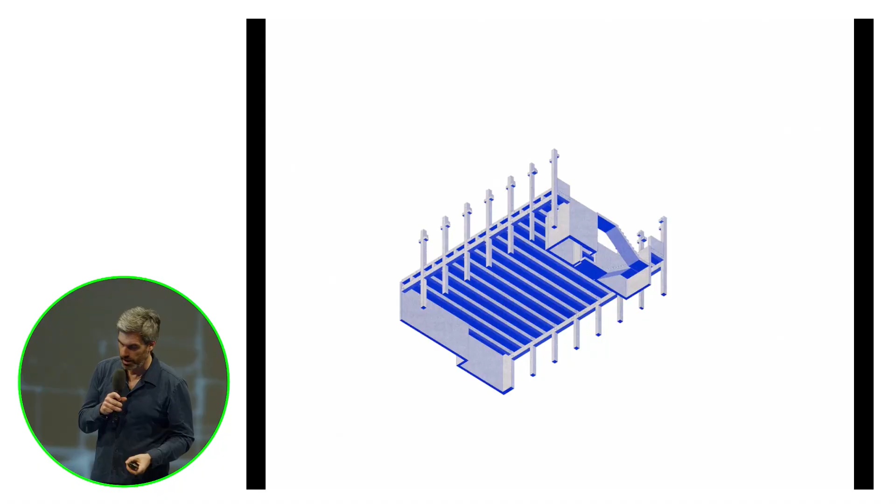The one is, how do you build very cheaply? That's one thing that people would potentially connect to the idea of prefabrication. The other thing is, though, how do you create the biggest possible variety of different ways of living?

Because normally you think of prefabrication as standardization and therefore a uniform plan that is being repeated, optimized, and repeated. That's the history of it. So how could we escape from that?

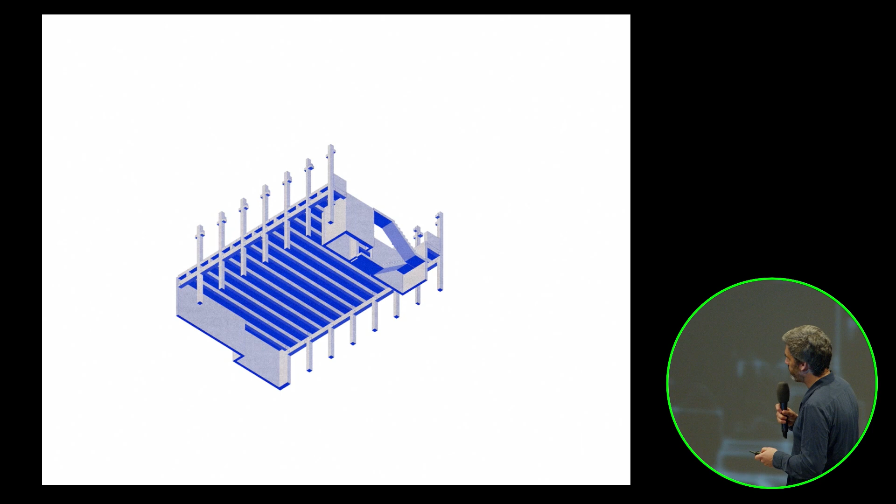I think the answer for us was actually finding a building system that's been around for decades, one for industrial construction, which you can see right here. And as it explodes, these are actually the parts of it.

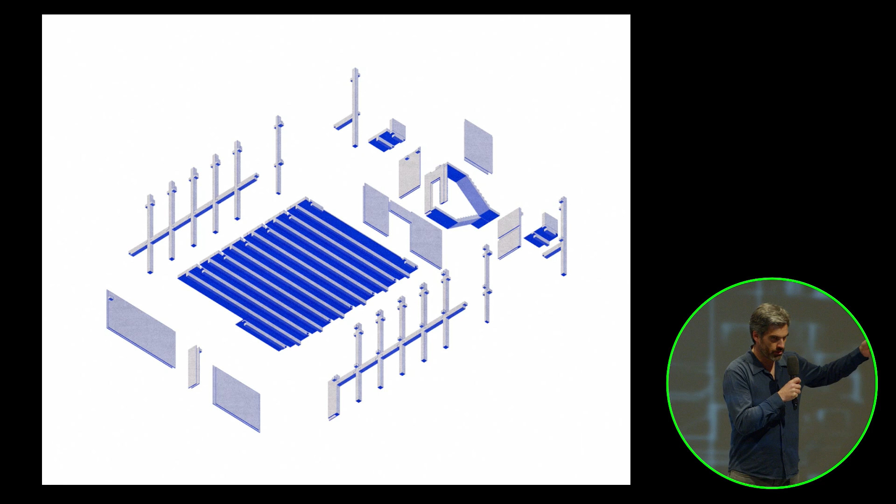The interesting part about it is that actually the structure is all on the outside, and it spans through the whole depth of the building. So on the inside, you can do whatever you want. I'll address it a little further.

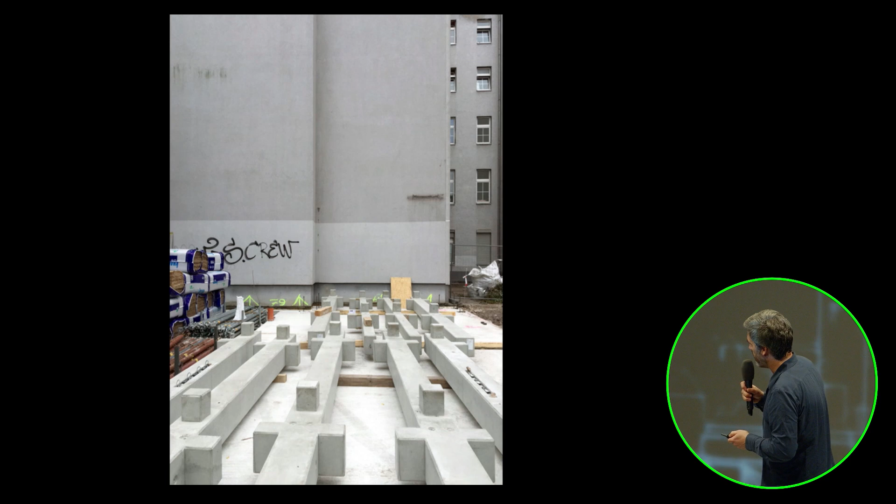So that's the model of the structure, actually. And that is a model of the pieces of one floor. You can get a sense these are prefabricated concrete pieces, as they first were delivered on site.

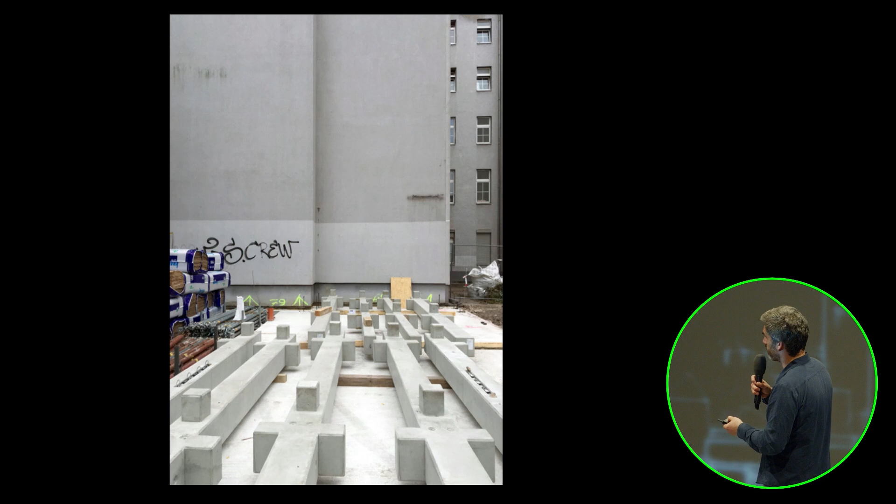So we have an inner city site, closing a block situation in Berlin. You can see these pieces, and those pieces are usually used to build industrial sites or logistics stations. Actually, the recent construction of the Tesla factory outside Berlin used the same pieces, same company.

I mean, not architects, but construction company. We wish. So now you get a sense, it's very simple. It's columns, beams, and the so-called TT ceilings.

Now I need a new button here. Yeah, this one. So they have these downstands, and they allow the structure to actually span very economically over a long distance of like 12, 13, or whatever meters.

But you can also see it's pretty rough. It's very basic. It's not architectural concrete, but it's engineering kind of grade concrete. And that's how you see how actually these pieces are made.

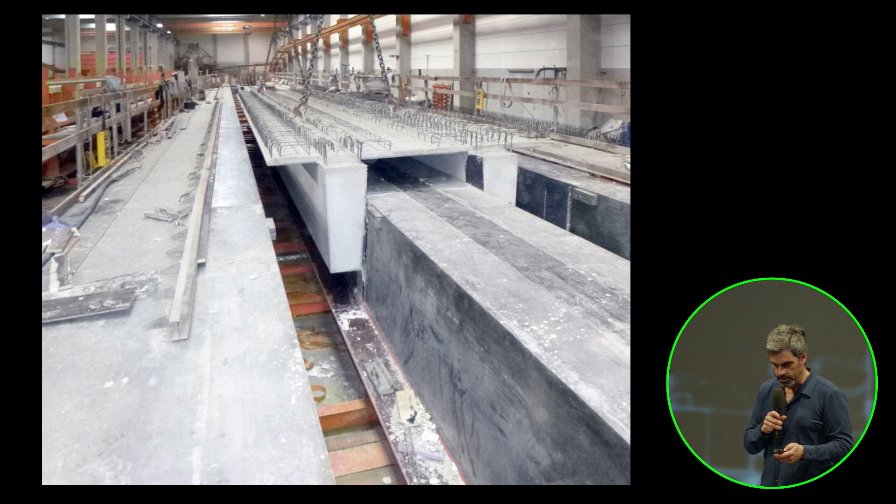Many of these factories have been around in East German history, outside Berlin, and they've been building for decades. During socialist times, prefabricated housing, and then they were respec'd and kind of did industrial work.

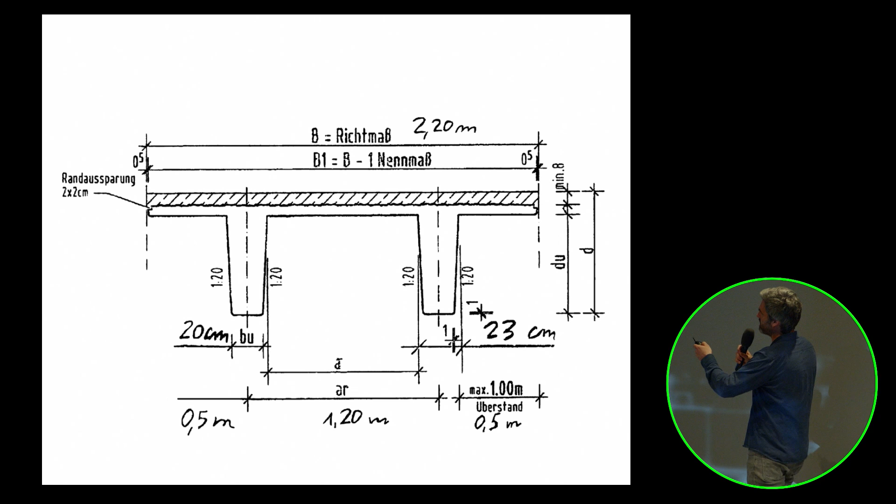So that's the key part, the so-called TT ceiling. It spans through the whole depth of the building. And actually, on every floor, we could then do completely different plans.

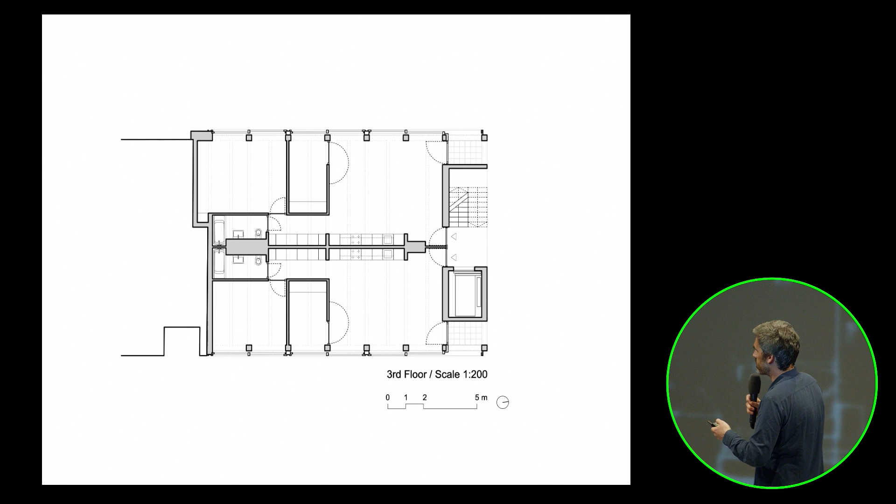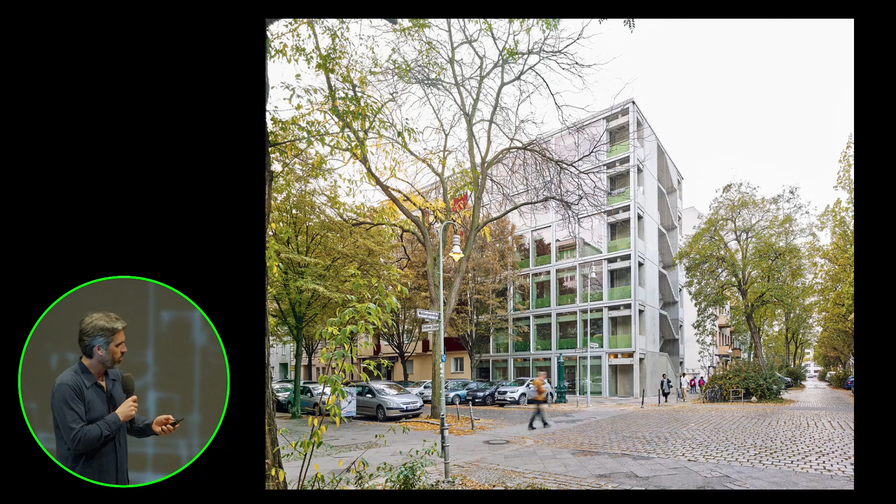The Wohnregal means there's a big shelf, which is the precast concrete construction, and within that shelf you put in what you want as a drywall construction.

You get a sense here as it sits in the city, and next to the precast concrete construction there's this facade of large-scale sliding doors and windows. During the summer months, which are hopefully starting soon, you can completely open the flat, so it's basically almost living in a large loggia on the back side. The north-facing facade is the cold part of the building, exposed to the weather, with the staircase and elevator, and each unit has a little loggia sticking to it.

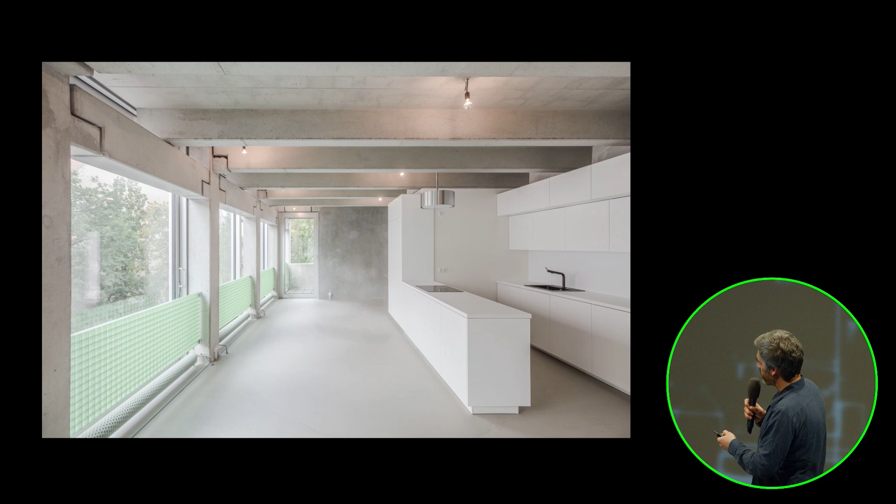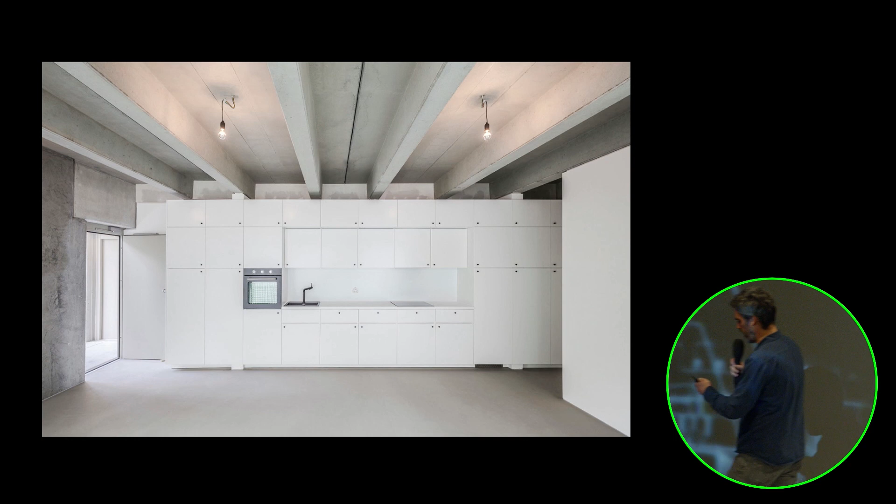So I'll go briefly through a couple of interior shots, and you get a sense of how some of these different units look. As they were, it's a rental - these are rental units, so here's the frontal view, like in another setup. You get a sense from all these photos, because they have a strong directionality, these spaces through these beams that span all around.

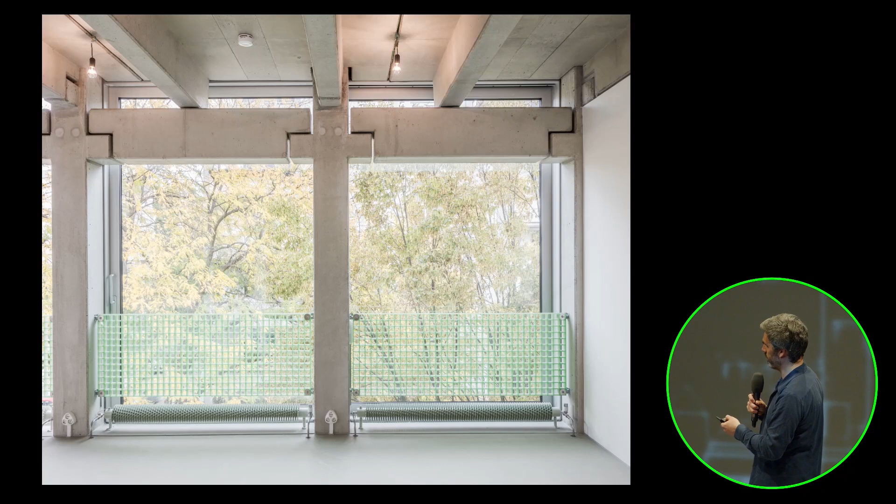Even though we're literally just moving floor to floor, they're set up and organized very differently from one another. Here you see these large sliding doors and the balustrade, and this part completely opens up, and in the summer it's quite nice - you're in the trees, you're outdoors almost.

Now, what you've seen so far are the usual architect's photos - white walls, some concrete, maybe timber on a good day. But actually, how are they actually inhabited?

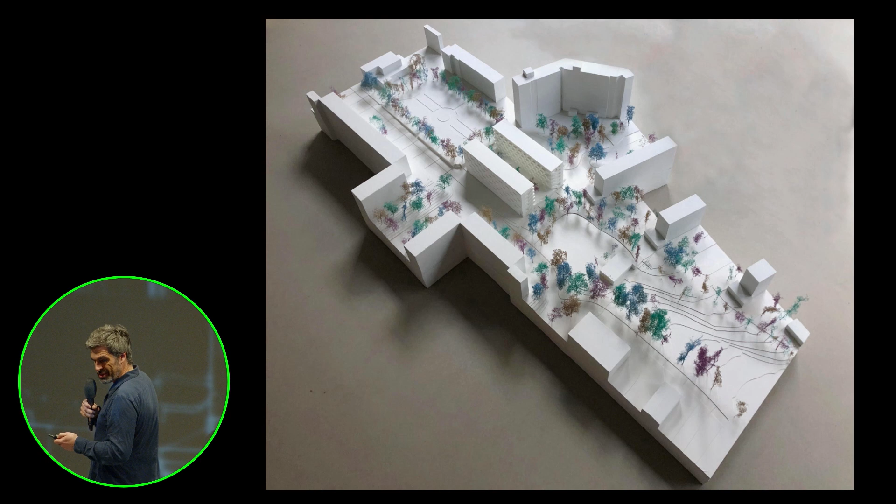So there's one other aspect - I'm confused about the time, it always stays at 19 minutes. Okay, either I'm super fast or we'll see.

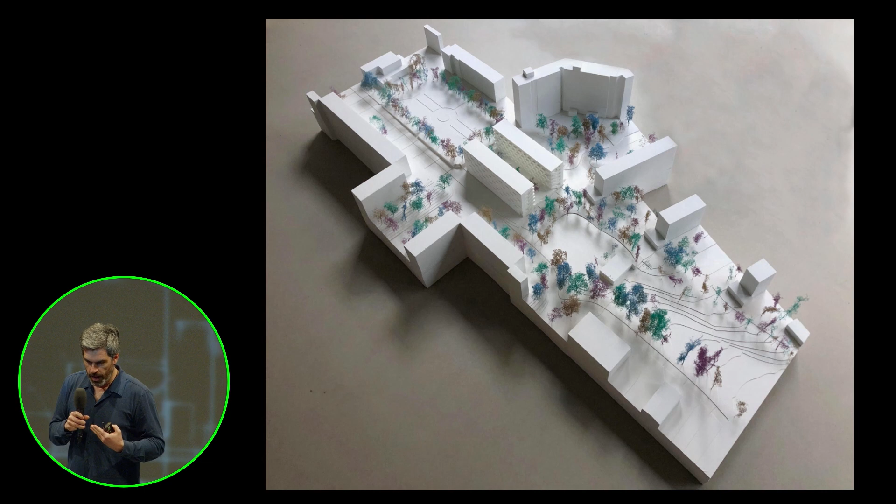There's something about the seriality that I haven't mentioned, which is obvious - you don't design a single building, but you develop a system, an idea, an approach. You invest a lot of time and knowledge that you gain, and then you hope that comes the opportunity to actually work with that system more than once, maybe repeatedly if you're really lucky, and maybe also on a different scale.

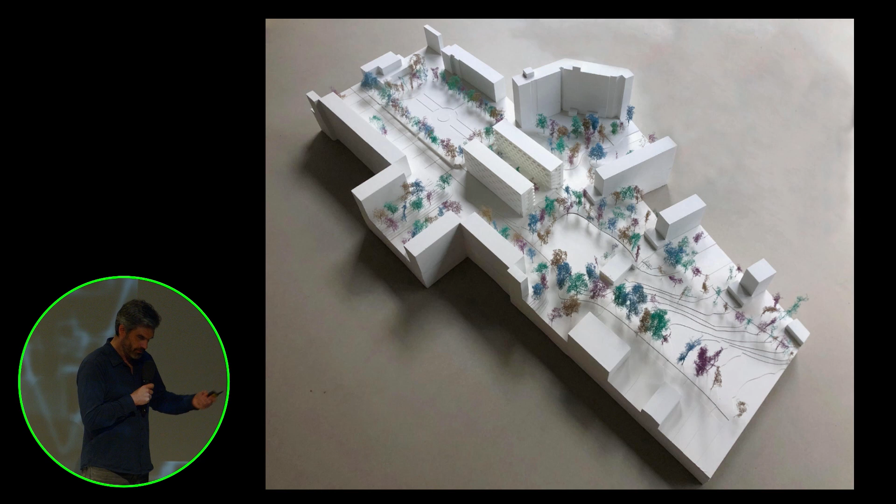In that case we were lucky, not only because someone approached us to take on that system and build with it again on a larger scale, but there was something particularly interesting: the Wohnregal actually developed an offspring that was bigger, but also set in a very interesting setting - one of these early 80s East Berlin housing estates. It basically is prefab construction of a different era.

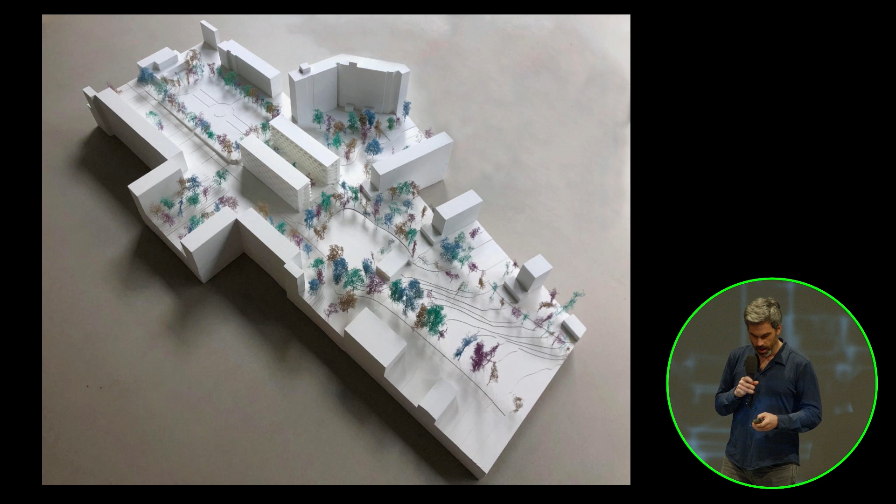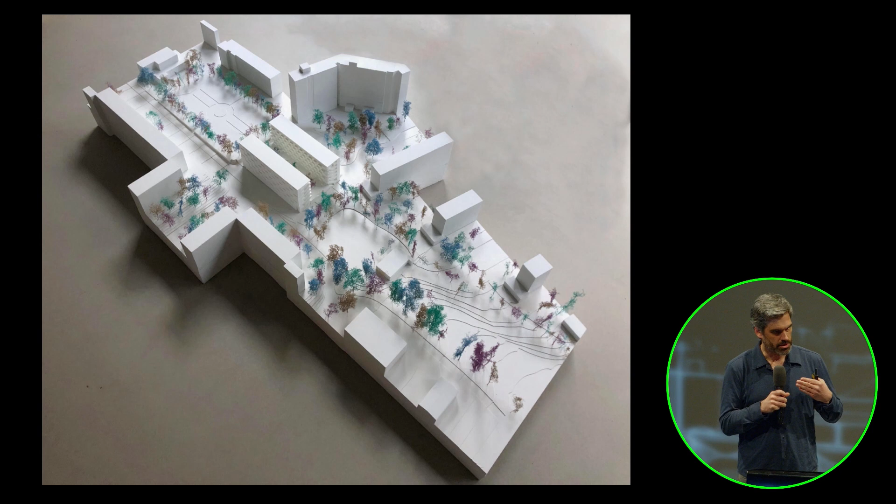It's like meeting your architectural grandparents. You're confronted with something, and if you know the surroundings of Prague we will see many of those too. It is, as I say, like meeting your architectural grandparents, but in a good family - there is some resemblance, but there's also some way you differ. If there's nothing you differ in, then there's an issue - you should move away. So it became clear to us to also point out where do we go along.

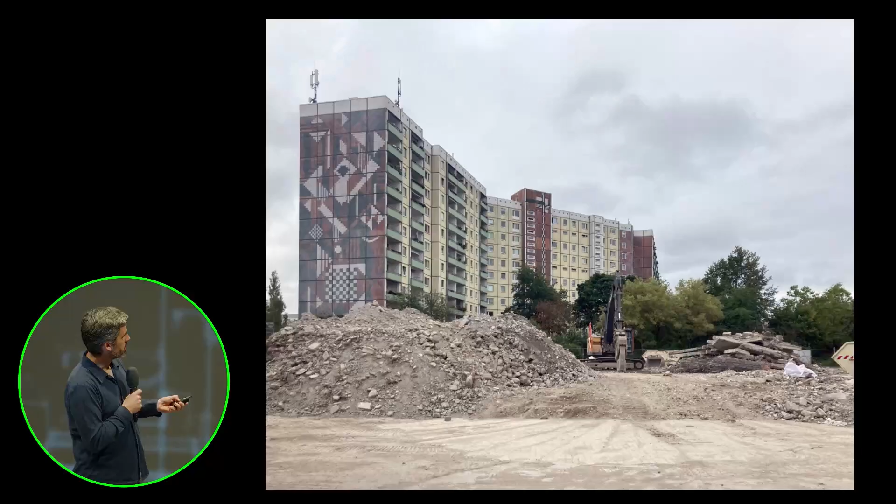Where do we have a lineage that we continue, and where do we actually set ourselves apart? This is the surrounding of ours, and it's all prefab. These are precast pieces - in German, you call it Plattenbau, and Platte basically means a plate. The name gives it away because you can see the grid.

Basically, prefabrication also means you prefabricate the space making - you prefabricate walls, and by assembling them you always get the same plans. The idea was to optimize a plan and repeat it to the nth degree, to total architectural death ultimately. We have a skeleton structure, and you systematize, but the space making actually happens on a different level, not through the prefabrication.

It's interesting because it's under construction right now, so you can see these two worlds and these two ideas of prefabrication next to one another. I assume there's something similar here, but in Germany there's a prejudice towards prefabrication, through a kind of historical setting.

You see again the pieces, and in this case we have a base piece with parking and mobility, and on top of that, as you move up, there are two rows of housing. While the first building, the Wohnregal I showed you, has one frontal circulation, here you have a gallery circulation with private balconies facing one another, and the units are all poked through with daylight from both ends.

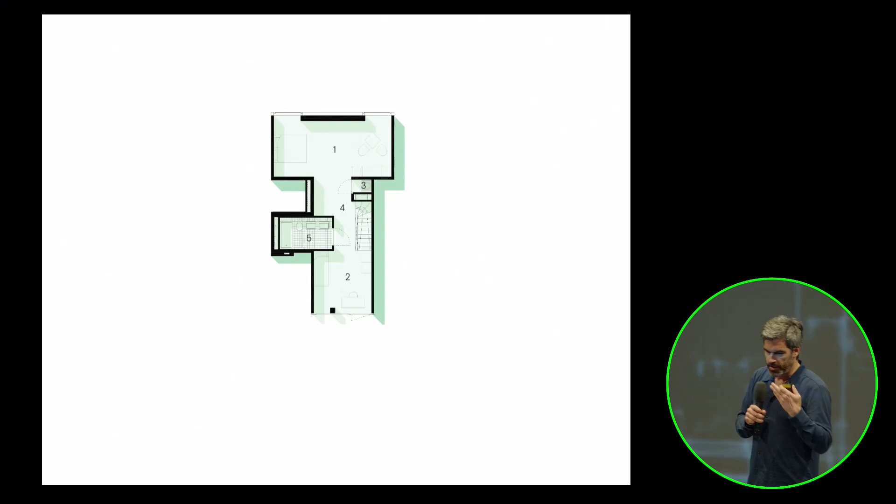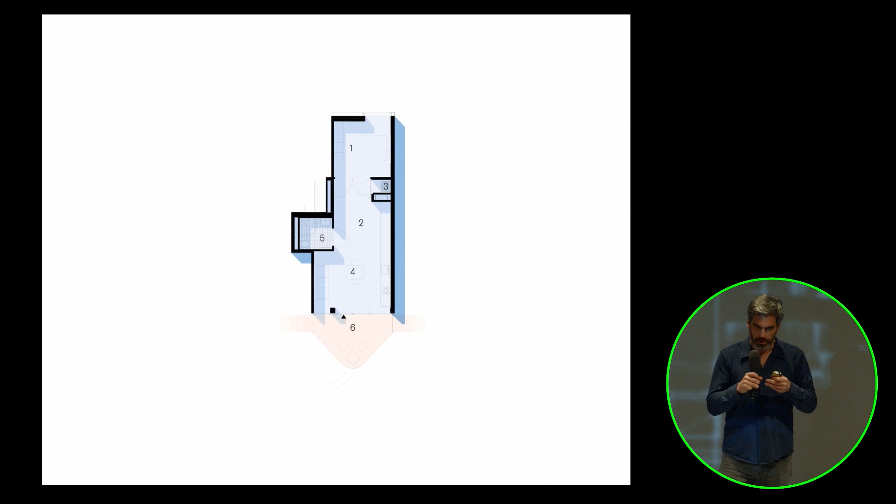Now to counter the previous idea, something set in many mindsets - that prefabrication means one fits all kind of unit - the idea here is to maximize variation. You have a very repetitive structure of over 1,000 pieces of concrete, but ultimately more than 50 different types of units. There's a large degree of variation with a very simple set - these are the cores, this is the main structure - and within it, maximum variation. That was the premise we set for ourselves.

Here you get an idea of how it was first visualized. You have these two rows, two gallery circulations, with balconies facing one another. It's a strange thing, because like these large housing estates from the early 80s with large green spaces, sometimes you lose it - you literally wonder where the urbanism is.

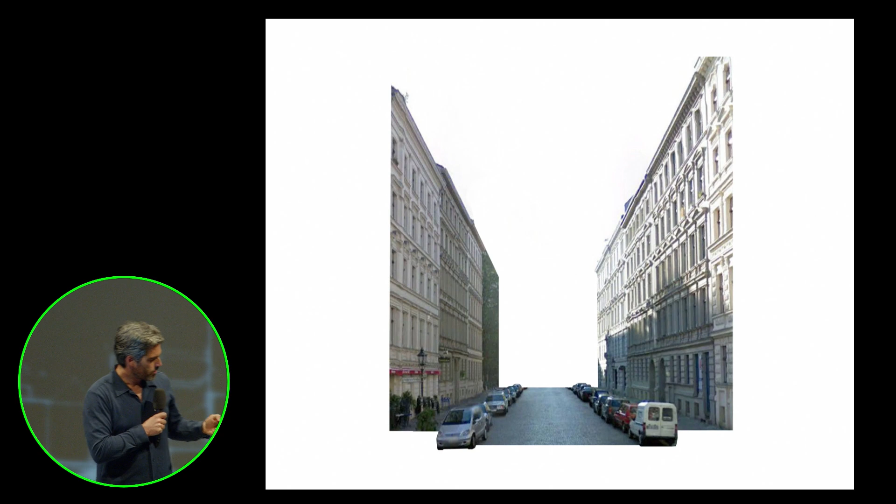This one is actually quite interesting - it has a very classical urbanism with a big green axis, and we're sitting at an interesting point within that. But as you densify these areas, where do you take your sense of how dense you can get? In this large scale, there's a certain brutality to it, and suddenly you move very close to one another.

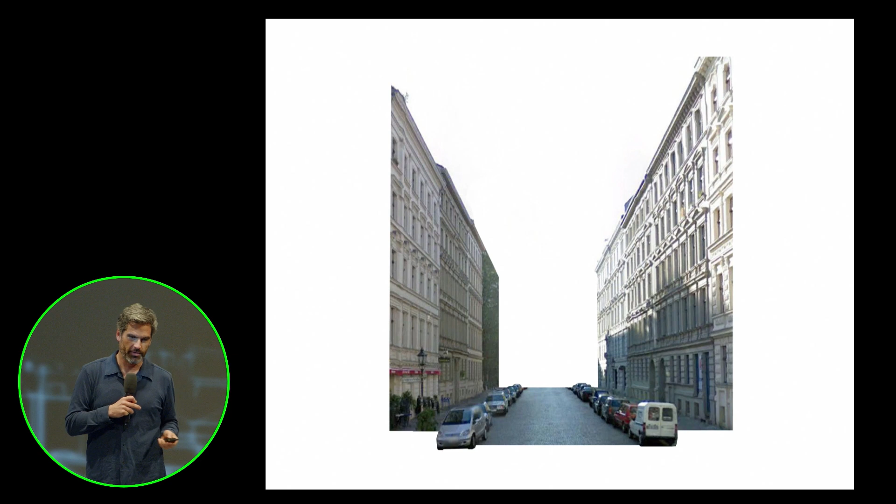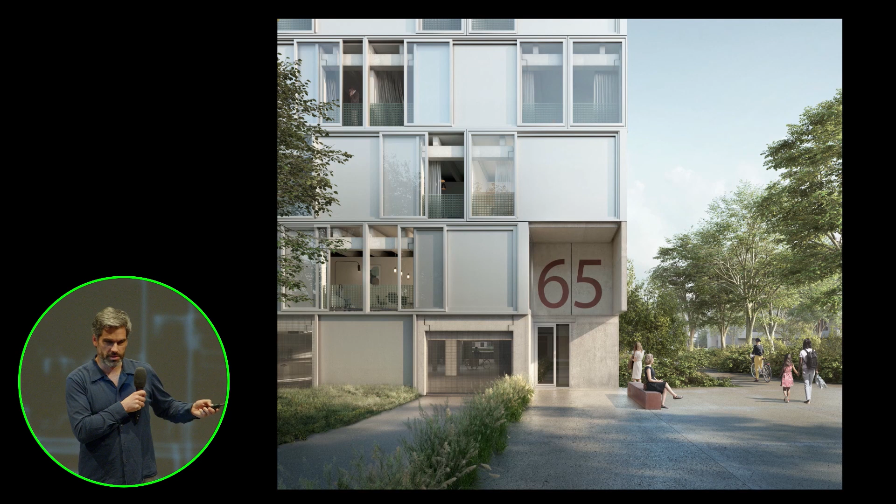It was very difficult to find the right scale in that. We approached it using the traditional Berlin end-of-19th-century housing streetscapes - we know their width, their heights, and how comfortable or uncomfortable they feel. This is literally the same proportions as we built. You see the precast elements as they poke through, insulation surrounding them, and the balcony plates on top. You have the outside facade, and you'll recognize the sliding windows, only with a slightly lesser degree of glazing.

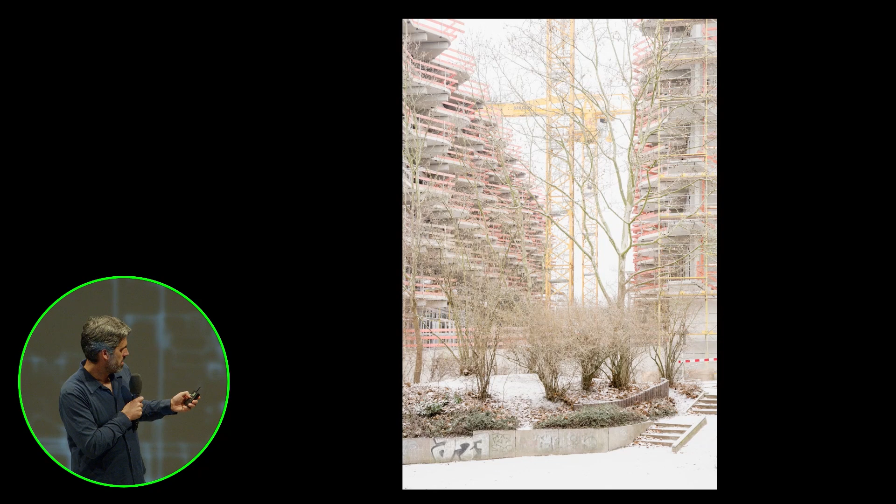I'll finish up with these two last slides, as it is under construction on a Berlin winter day. Thank you very much.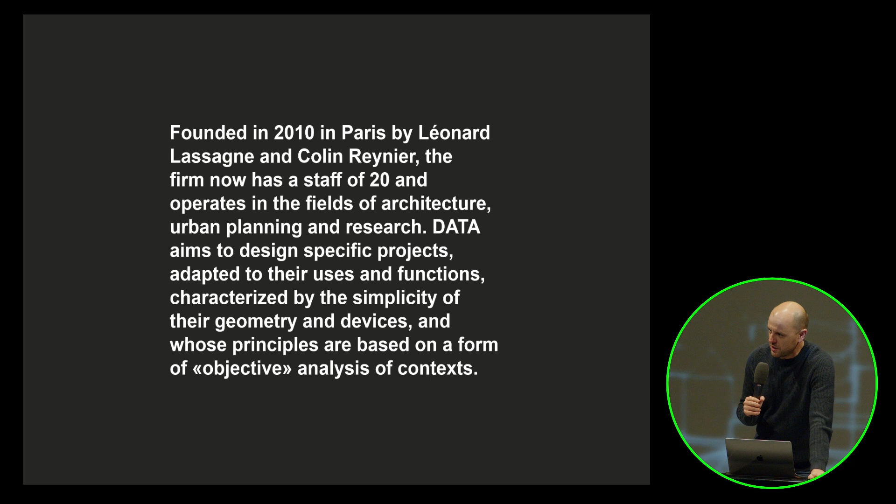Your presentation was really interesting. So I'll try to explain our work and the project of RATP housing in Paris. As you can hear, my English is not so good, I need help probably, and this is the reason Laure and Willem are here. I like it when the architect who worked on a project speaks about it themselves, it's really important to me. So we decided to talk about two main things.

I founded my agency in 2010 in Paris with Léonard Lassagne, and our agency works on many kinds of buildings. So we decided to talk about two main things: first, our practice history, who we are, where we are from, and what could summarize our work in theoretical terms.

Secondly, how we understand the question of history with the question of heritage and ways to transform existing buildings, because my agency works principally on existing buildings in France and in Paris. We can probably say we've been strongly influenced by architects and designers of the 60s and 70s, and also by the famous French architect Christian Hauvette.

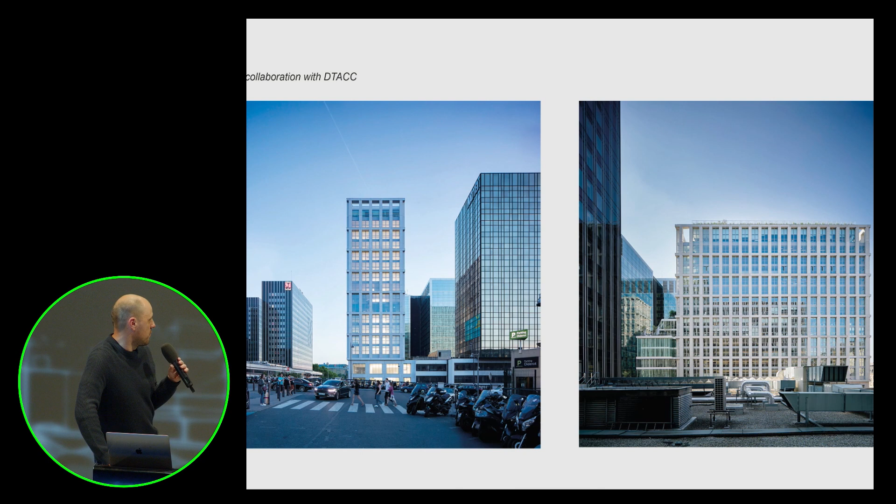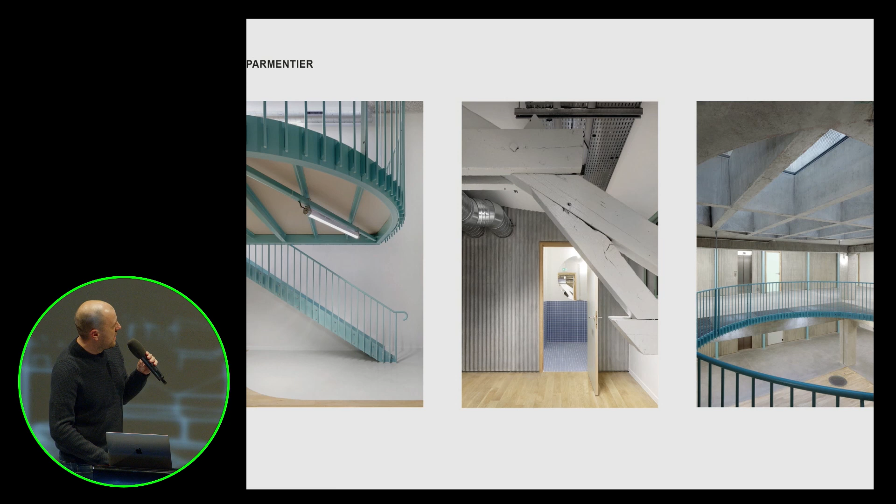Another project in Paris is the transformation of an existing building near Gare de Lyon into an office, which was a really important project in Paris. Another project, we transformed a patrimonial building in the center of Paris and created new offices, combining new architecture and new design for this project.

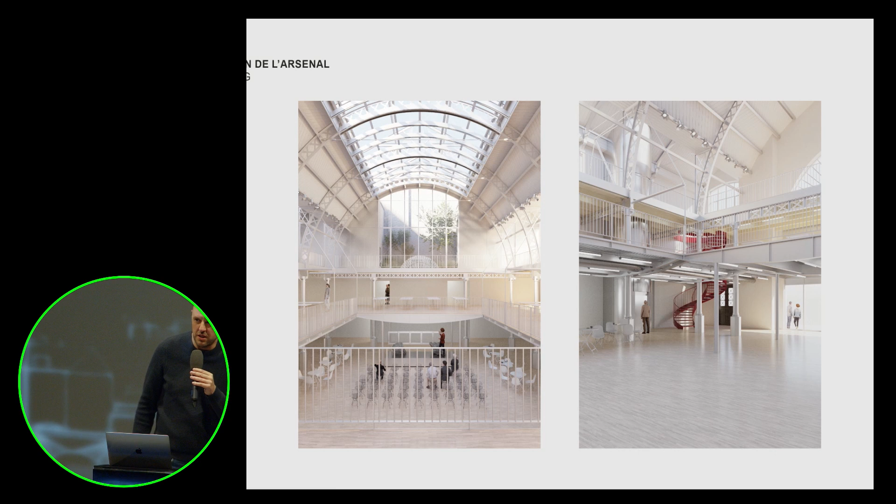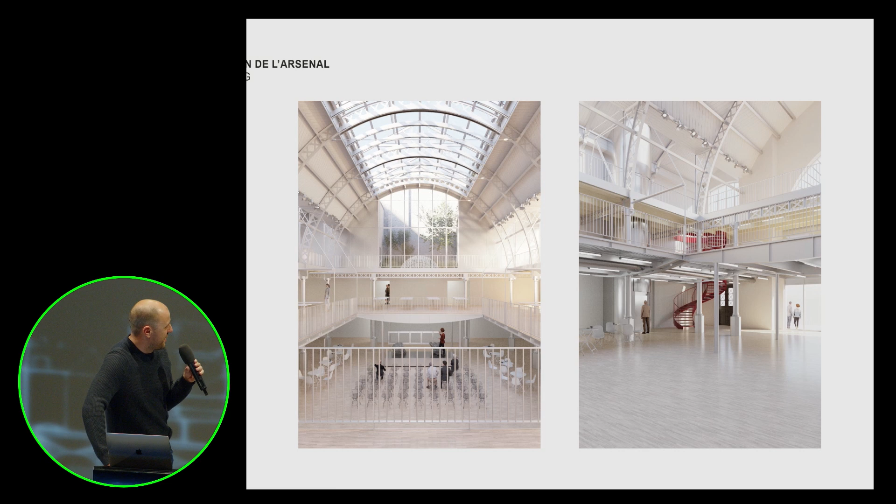This project is a new one we're developing now: a transformation of Pavillon l'Arsenal. Pavillon l'Arsenal is like this building, it's really important for French architects, each French architect critiques my work there at the end. So this is another approach.

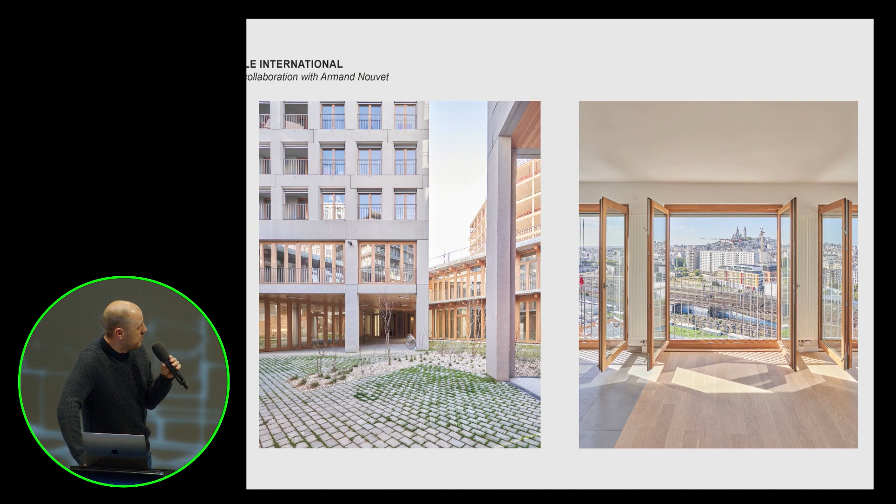Prefabricated housing at Porte de la Chapelle. We developed this project with Armand Nouvet, another French architect. It's housing too, and we have a view on Paris.

Another project inside Paris, in the protected area Le Marais, where we created a commercial area for Groupe Galeries Lafayette. This was before the crisis, because now you can't work with Galeries Lafayette, they do nothing, they're finished.

So now we'll speak about this project, RATP Housing. This project is close to Place d'Italie. You can see, just look, we worked on this building.

During the competition there were 4 teams, and we had the choice to decide to destroy or to conserve the building. We decided during the competition to conserve it. So I said to the other companies, the other architects, today I don't know if I'd choose the same thing because it was really complex, but now it's finished, so I'm happy.

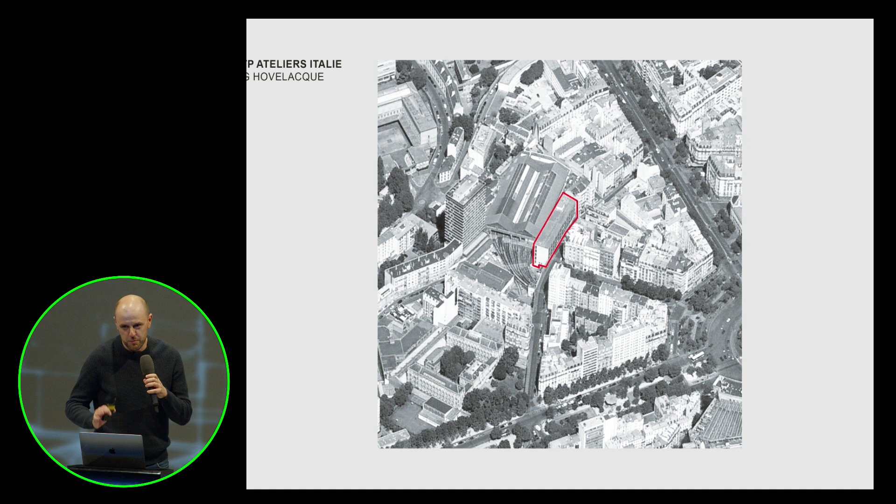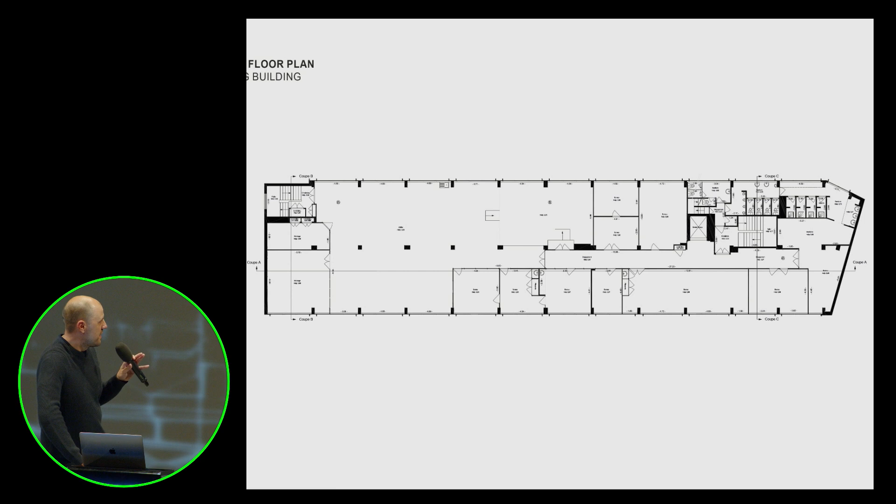This is the existing building, I think it was a good building. This is a plan, so it's really simple: you have a column, you have a facade, a really simple building with upper floors.

The other difficulty is being near an industrial context, because RATP repairs all the trains for line 6. So it was a construction with this here: you have the rail, and you need to build the building while the trains are here all the time. So it was not really simple.

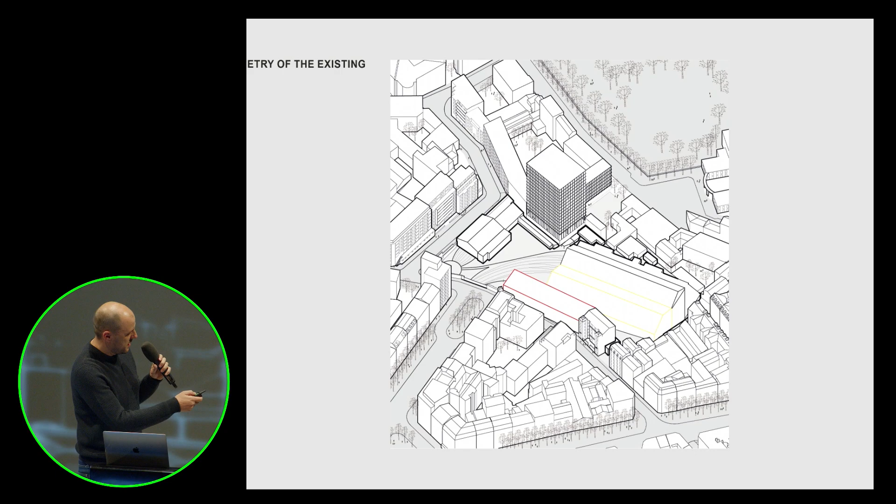So as you see, the project of RATP is to remove this part and to transform this building. They create a new hangar to repair the trains, and create 52 houses for their workers.

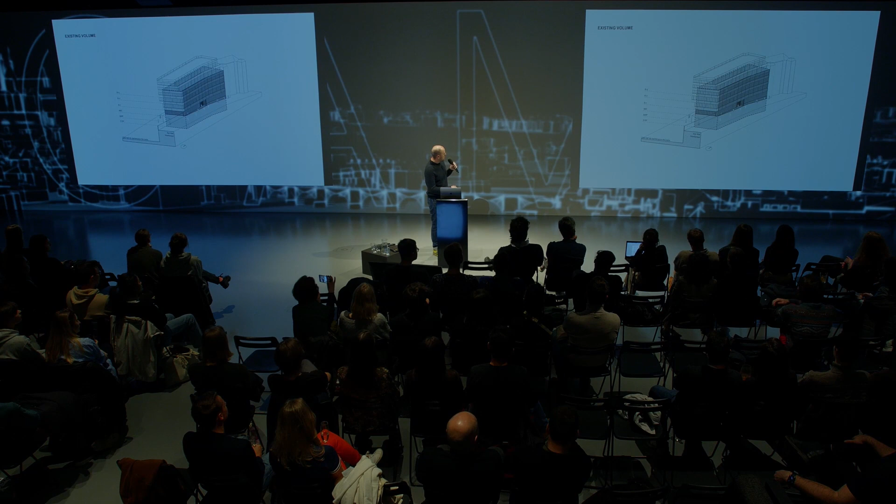And in the basement, we create a program for offices for line 6, because all the trains go inside the subway, and after they go to Paris for the station.

So this is the existing building, and here you can see the volume of the existing building and what we create. We add 2 additional levels on the existing structure. The second thing is to create a winter garden on the industrial site to protect all the houses from the problem of train noise and many things.

Another extension on this part. And this is a section. So here you have all the technical offices for line 6, and here you have all the new houses for the RATP. The problem is we have 2 clients.

It's the same group, but we have 2 clients, and they don't speak together. So here we have a limit. Every column, every pipe stops here, and we just have a negotiation to have a connection for the ground floor for the houses. So it was really complex to have one building with 2 clients with two different opinions, with two different targets.

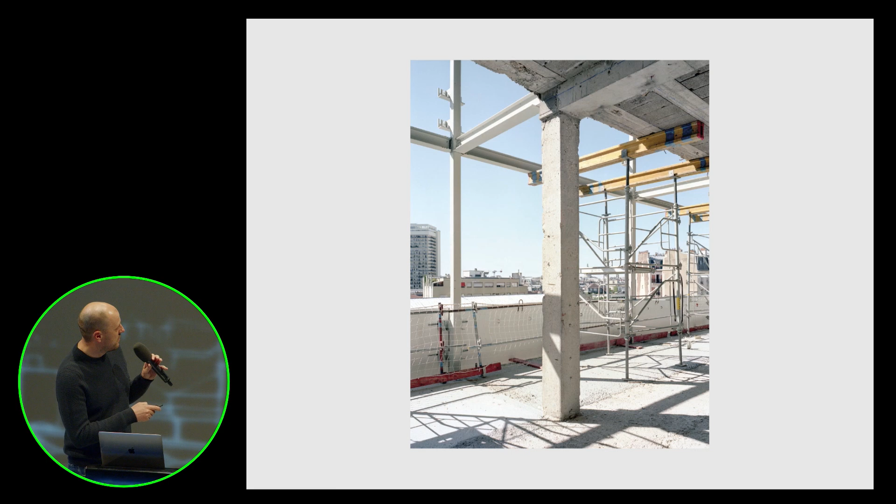A picture from Paris. A new picture near the maintenance station. So this is a question about the weight - as you can see, the columns are really, really thin. It was all the time our difficulty, because we need to have really thin elements. Columns are really thin, and the ground and floor are really thin too. Everything is in metal.

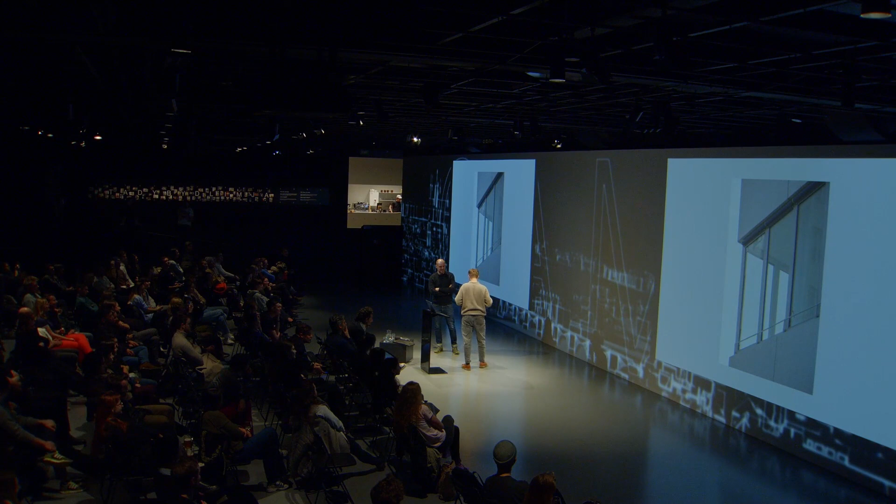So you have this photography. You have a contrast: existing building and the new building. So this is the building before, and this is the building today. I don't know if it's better, but today everybody really enjoys being here.

So Willem will speak about the facade. Merci, Colin.

The apartments in Paris are not big compared to other cities, but what makes them cool is the view. So what we wanted, because we don't have any restrictions in terms of structure - our structure is based on columns and beams - we decided to make these kind of stripes of windows, and thanks to this concrete parapet, you can even make a kitchen here, and you can enjoy the view while cleaning your dishes or cooking.

In our project, in the upper part you have housing and the control room, as Colin mentioned, and the intersection of these two programs is on the ground floor. So on the ground floor, you can see the kind of pockets which allow us to enter the apartments, and the rest of the building is offices.

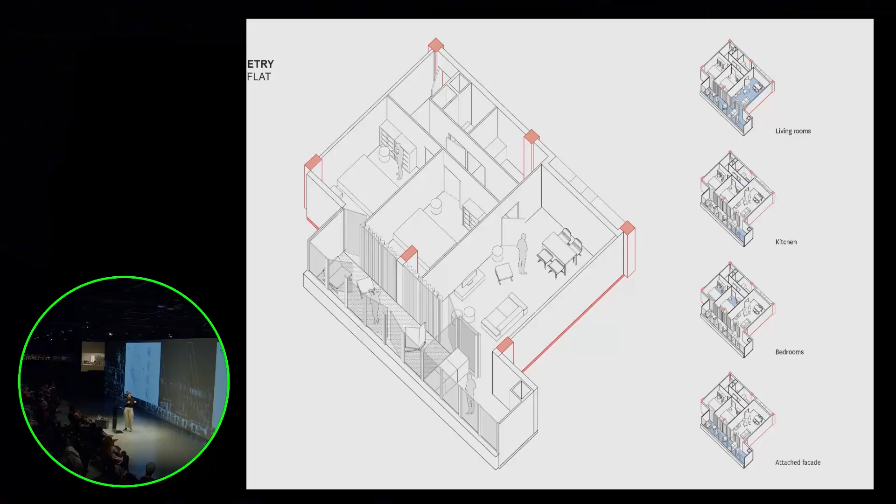So a few words on the quality of housings. As we said before, we added winter gardens and kitchens on one side of the building to protect the existing building from the industrial site. Thanks to this addition, living rooms are extended to the front, to the facade.

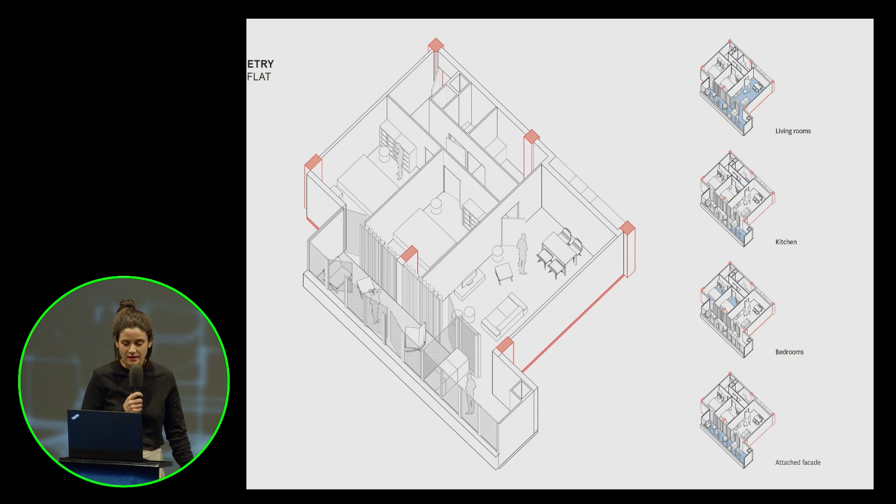So we have this feeling of a larger room. It also protects the bedrooms from the noise and from what's happening on the industrial area. This winter garden is an unheated space, but it plays the role of thermal and acoustic protection for the bedrooms and for the housings in general.

It also allows a different type of distribution through or along the facade, which we can call the French corridor. It's like some typical distribution in castles, for example in France.

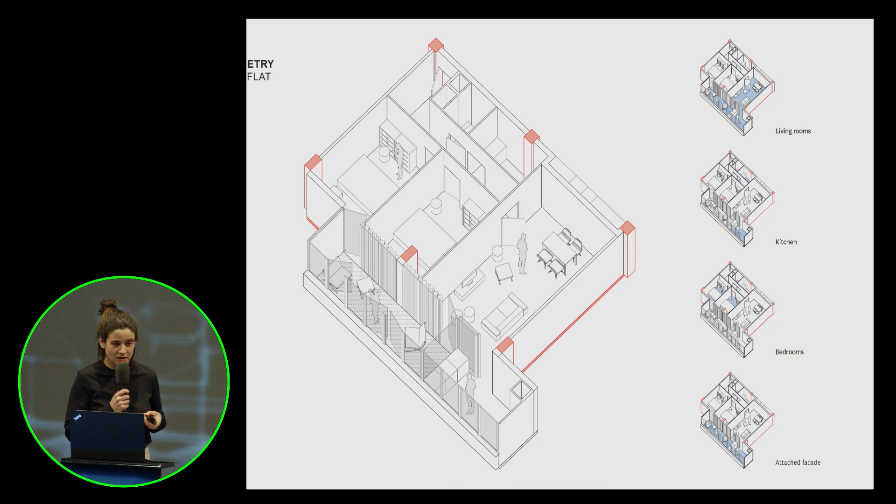Another important thing to say about the process of transformation is that in general, when you build a new building, it's more the building that is built around the program. In transformation cases, it's more the programs that will adapt to the building.

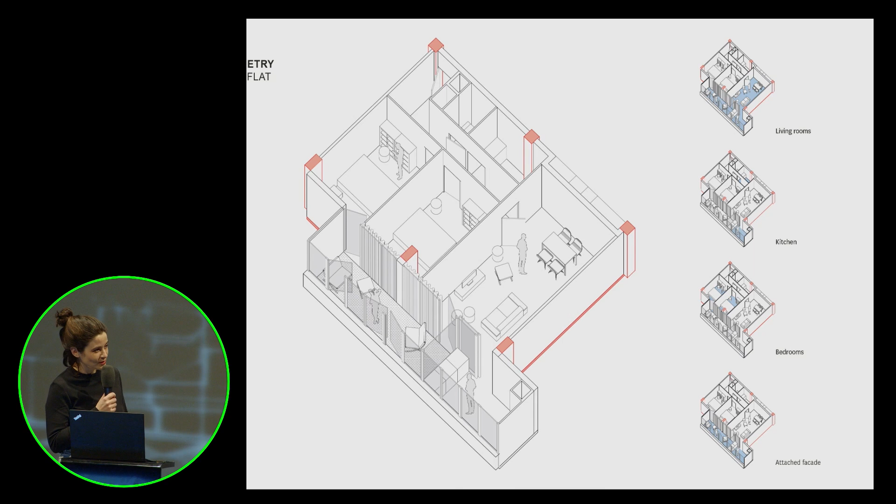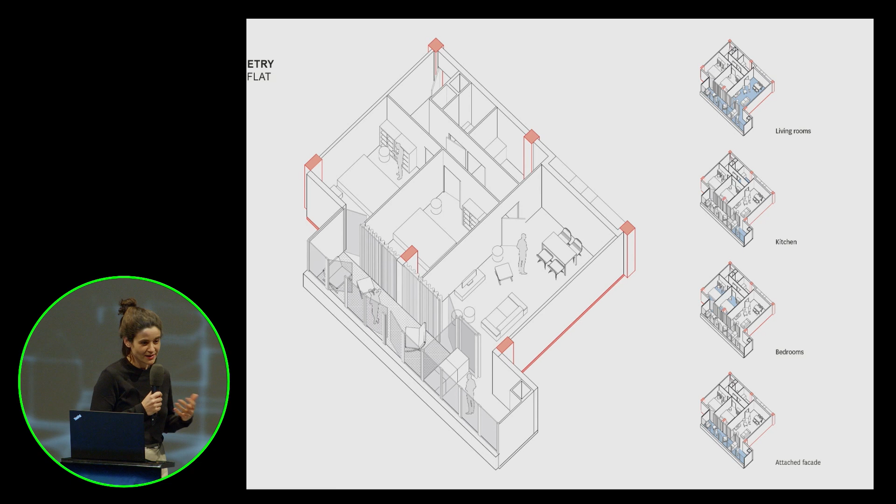So it leads to two things. First, it leads to some discussion with the client because you have to adapt. The program will adapt, and you can't really answer the program perfectly, because if someone asks for a Parisian flat, which are quite small, sometimes you have to add a few square meters to make it work inside an existing building.

Here we can see the example of what I said about the double facade, like the winter garden. The distribution in the facade leads to this external or middle external space. The rooms are protected from the industrial building on one side, and lighted on the second facade, but you still feel like you have more space. Also, as we said before, we worked on this facade, so we had a glazed band all around the building, so we can really see through Paris, which is a really particular situation.

The fact that we have to adapt the program to the building leads also to variation in a typological subject. Here we see random flats from the building. The richness of this is that you have several typologies, like cross typology in the corner or mono-oriented, but with terraces or with this winter garden.

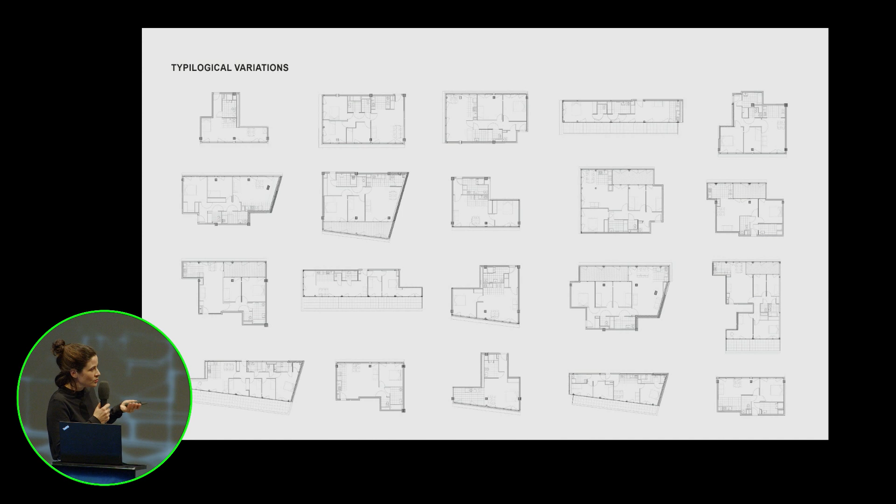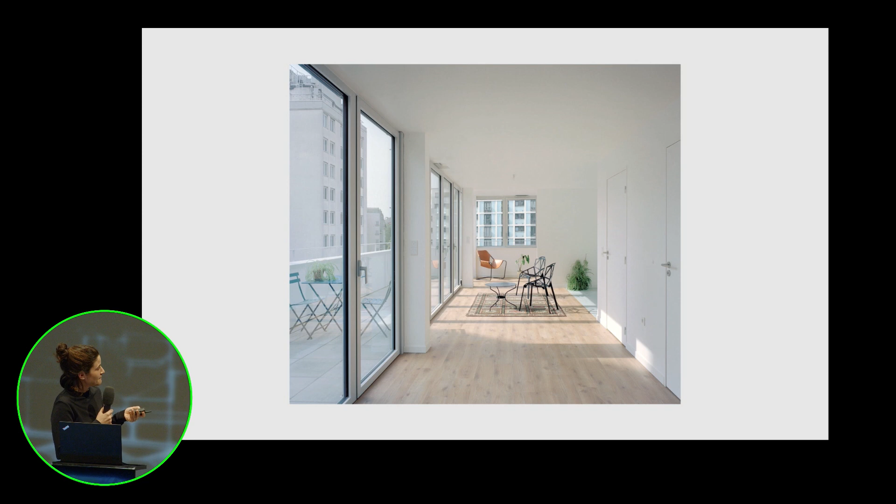We can also use the existing building to have variation of ceiling heights. In these buildings, we have less access to natural light on the lower floors, but these lower floors are much higher, which in a way leads to better housing. On the two added floors, you have a low ceiling, but large access to light, and terraces, because the added floors are detached from the front facade.

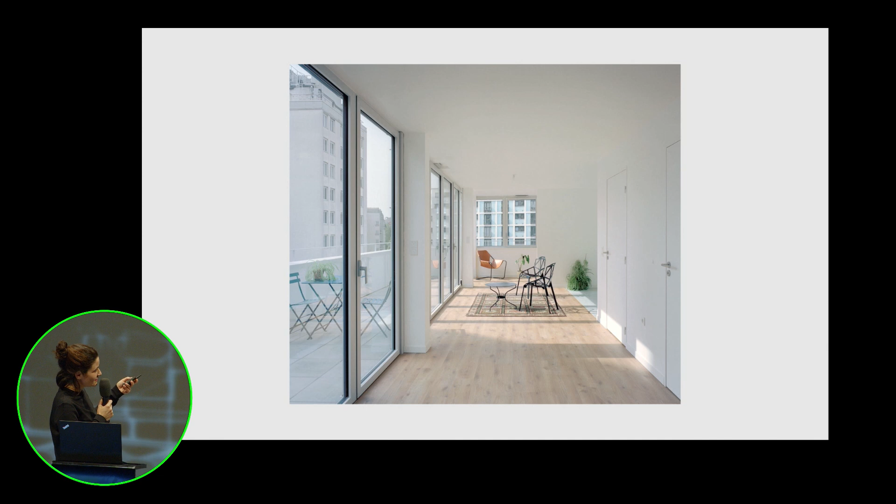This is a view of the upper floor, the added floors on top. There was quite a discussion about these housings because they're only two rooms, and they're super open to the terrace.

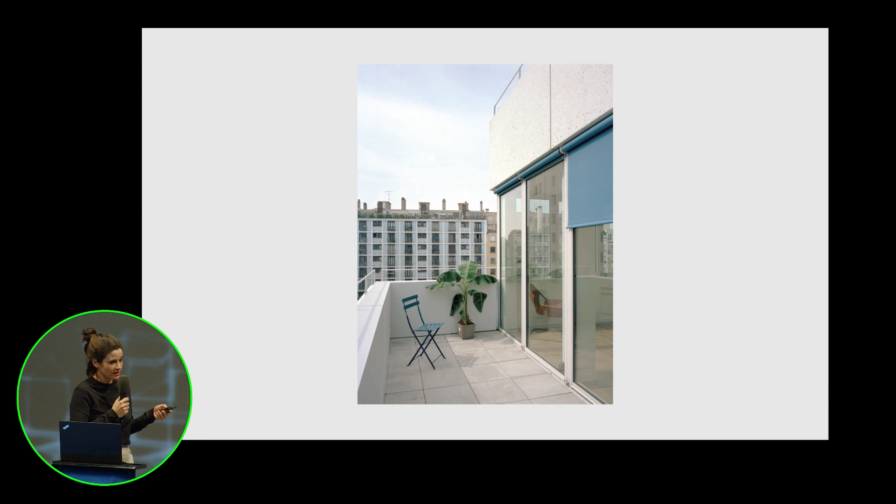This is a picture of this. Mainly on one side we have winter gardens, and on the other side we have these large terraces. So each facade has one specific purpose and answers to the surrounding. This is a view of the building from the surrounding.

I don't know if you want to add something, but I think we've said everything.

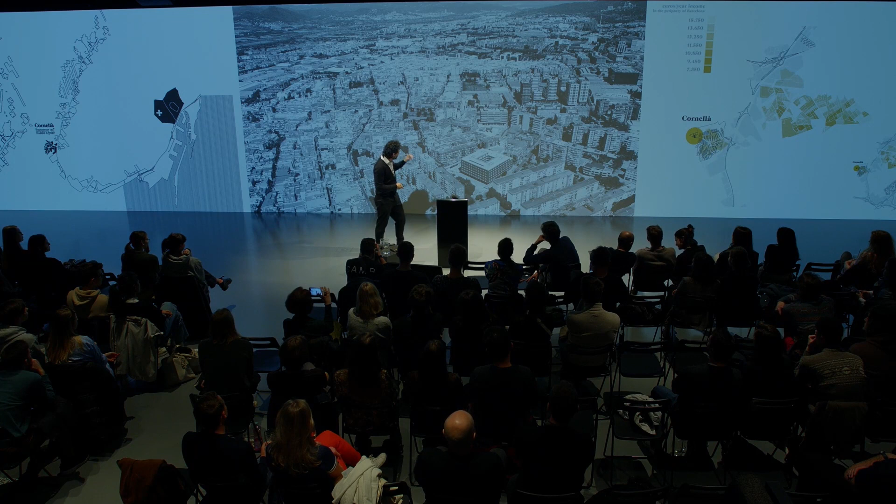Cornellà is a town, but actually belongs to the metropolitan area of Barcelona. It's in this neighborhood that in the 60s was moving, they moved people there, and it's a very low income area, full of these buildings, and it occupies a plot where there used to be a cinema. Before the competition, the people were saying, 'Pisa sí, pisos no.' It was saying this because the cinema was called Pisa, and they wanted to still have the cinema, and they didn't want to have the dwellings. But I think now they allow us to be there.

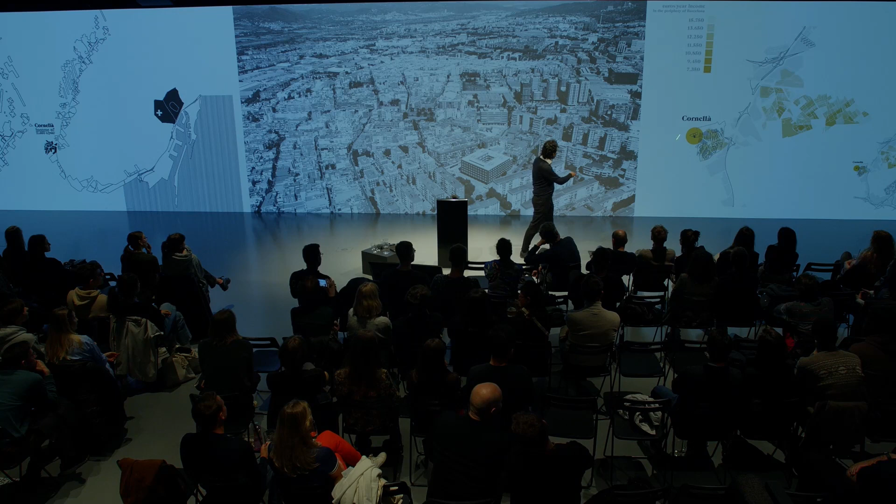But the important thing is the income area. This is the same city map of the metropolitan area of Barcelona, just showing the low income per habitat in the city, and these are the poorest areas in the city. This is one of them. They are around here, less than 10,000 per year.

Okay, we did the competition, and we had the plot. The plot was this thing that we couldn't change the planning regulations, so we had to fit our building in this 50 by 40 plot, and it was compulsory to have this patio of 15 by 25. We nearly didn't do the competition because we thought there was no interest. But then we thought, well, what happened if we, instead of beginning from the city...

What happens if we begin from the interior and try to do a building with all equal rooms. Making all equal rooms changes a lot of the rules of a house, because when things are equal, they are easily changeable. And where things are equal, there is no hierarchy. You don't have a room for the parents and a room for the kids, they're all measured the same. We thought it could be a way to answer the new ways of living that we have after COVID.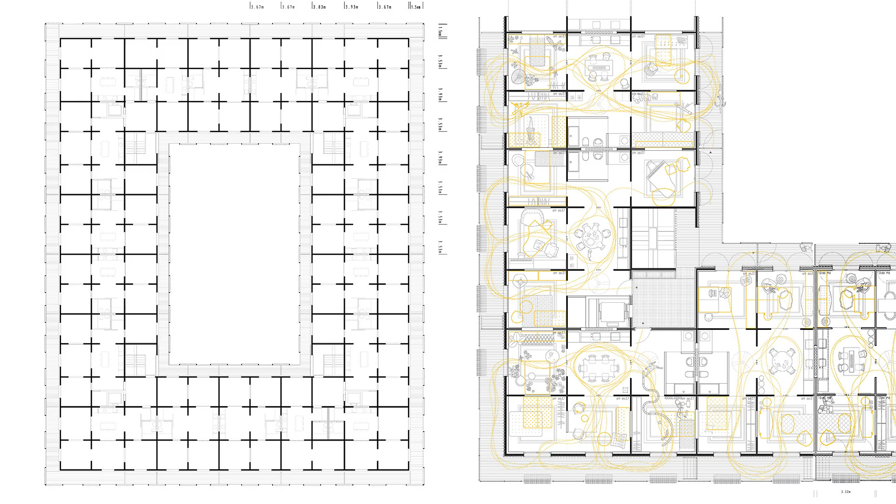Then we have this idea of the plan. The important thing of the plan is this idea of indeterminacy. For us, it's good news that when somebody sees the plan for the first time, it's very difficult to understand which are the limits between the different units, and even the limits between the public space and the common areas. Okay, here we can see it more.

So we have 4 cores, each one in one corner. Here, with 2 kinds of units. One, this aggregation, you enter to 4 dwellings per plan, and in this aggregation, you enter to 5 of them. So you have 5 and 5, 4 and 4.

So you get, in this common room, another room of 360 by 360 where the lift leads you. The stair also fits in the same matrix, okay? And this is the only corridor that we have.

So the important thing is that from here, you enter into a private terrace. Normally the houses have 2 terraces, the one of the entrance and the one of the outside.

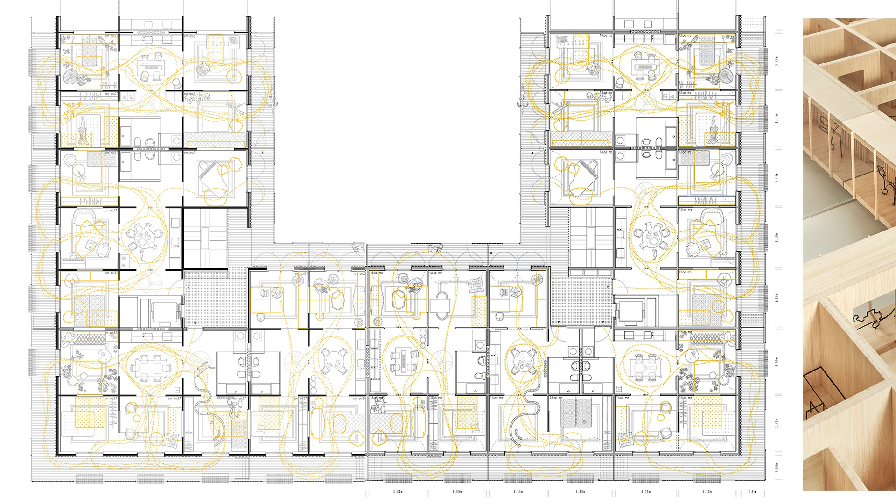Here the same situation, and in the corners there's this situation, the 4 modules and a half, and 4 modules and a half, 2 rooms, 2 bedrooms. Another situation was 6 modules and a half because you have the lift, and here you have another 4, 5, 6 and a half, and another. This is another corner with 6 modules.

This is all the corridor. This is the common area. And here, you see, this is the entrance of a house. So you are entering through the exterior space.

This is a kind of a collage, a way to change the scale for us. It's important, people are entering through the porch and going to the lifts. But then for us, it's important these sequences of spaces, the porosity of the plan, ending to the room, to the corners, the importance for us of building the corners in order to help people to lay their furniture.

And when you enter the house, you have this porosity. This is a bedroom, but you can lift your eyes and see the exterior through the private spaces. And it's important not to see the end, not being able to see all the dwelling in one point of view, to have some things out of the plane.

Okay, so the kitchen, the importance of the kitchen in the center of the house. That's what helps us do a house without a corridor. Placing the kitchen there visibilizes the domestic work, so it helps us work against the role of gender, but also helps us do all the circulations through the dining room, and the kitchen becomes again the center of the house.

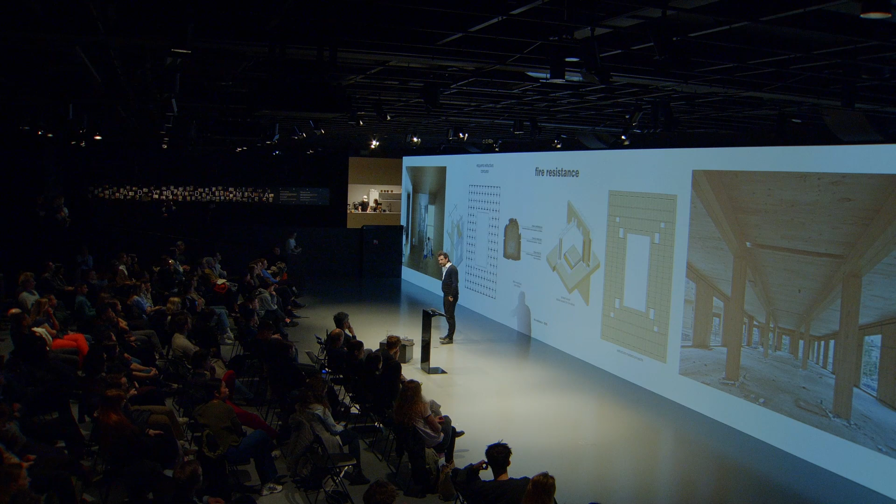When we did the competition, we were thinking of this ideal structure, making all the crosses with timber in order to generate this image. We were even thinking of leaving all the structure exposed. But when we began to understand how to build with wood...

The fire resistance was one of the main issues. There are two strategies for fire resistance. In this building we need 90 minutes of fire resistance, meaning we have to keep the building standing for 90 minutes. One strategy is to allow some part of the wood to be burned: each extra centimeter we add gains us 30 minutes. So for the slabs we left exposed, we added 3 extra centimeters to get 90 minutes.

The other possibility is to put plaster boards; each plaster board covers around 30 minutes. So in this case we used 2 plaster boards plus 1 extra centimeter in the CLT of the facade. We were able to do this for the slabs and facades, but for the middle crosses it was very difficult, since it meant adding 3 extra centimeters on each side, which was too expensive. So we decided to change the strategy to beams and pillars of glulam in the middle of the plan, because they can achieve fire resistance without extra material.

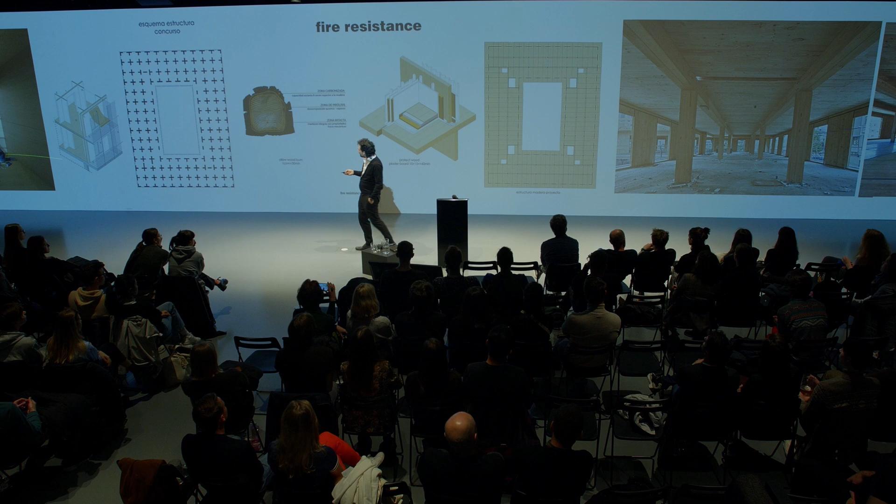It's social housing, and we had a very low budget to do it. So one of the things was to work a lot on the optimization of the structure.

From the beginning of the competition, we took a span of 360, and we thought about the deformation of a board with 2 supports, which was around 6 millimeters. But if we made it continuous with 4 supports, we compensate moments. This was a very boring lecture we had in university, but it was useful in this case.

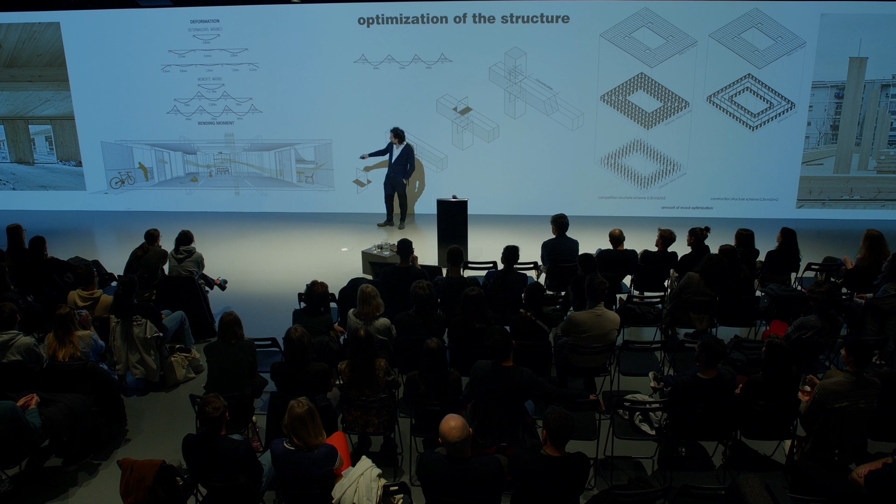The deformation can go to half. And if we add the cantilevers, the deformation gets even lower, around 1 millimeter in the interior part. That's how, at the beginning, we needed more than 15 centimeters.

We were able to use only 12 centimeters with the optimization of the compensation of the bending moments. Then we built with 15 centimeters in order to have the 3 extra centimeters we needed for fire resistance.

For the pillars and beams, we had to do the same, but we cannot have continuous beams along the whole length of the building, so we had to make joints. Making joints with wood is very complicated—they use dowels, and it's very difficult to have a hyperstatic system. So making the joint at the support would have meant not compensating the moments.

So the decision was to make the joints where the moment is zero, at 1/5 of the distance between supports. That's why we designed this piece—the clue of the building. This metal piece allows continuity of the pillar, while the beam can pass through on one of the sides. It's 40 by 36, so it's 2 beams of 20 by 36—20 being the standard width of a glue-laminated beam—to make this joint.

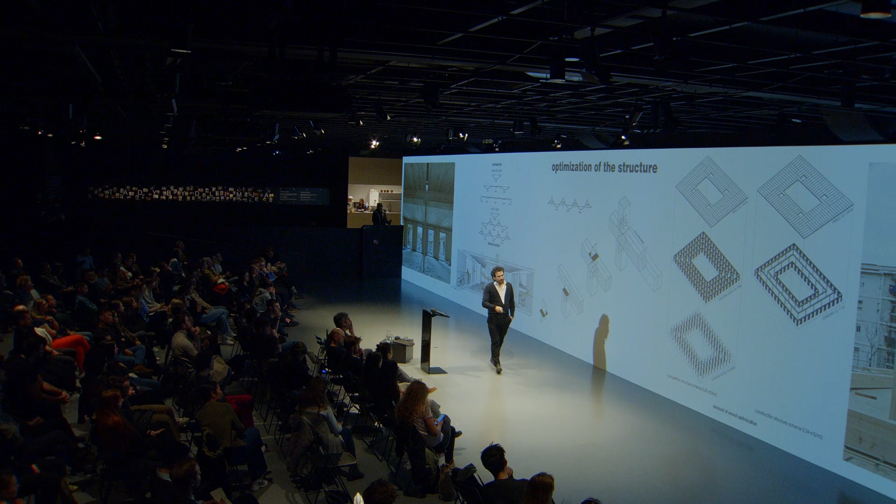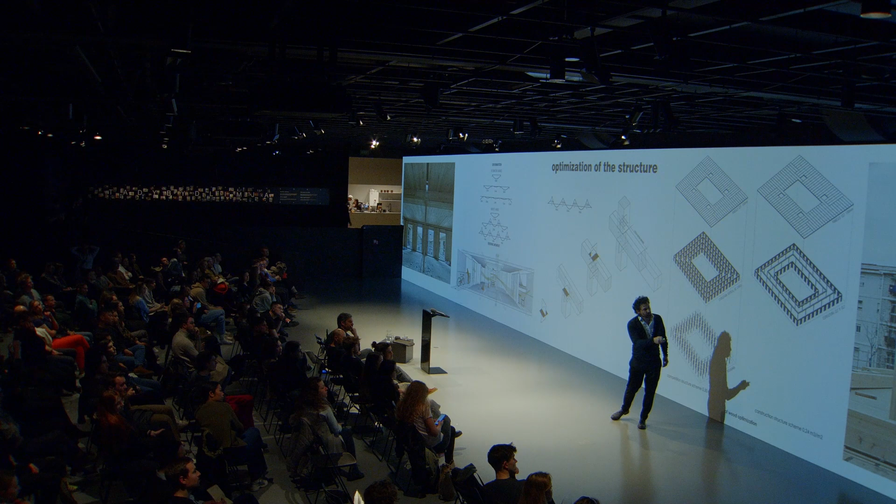Here you see the piece, this is the element. For us this element is very important, and this is the detail—you see how the beam passes through, and the pillar goes through the same space where all the conduits run through the building.

So the final thing is that in the competition, we needed 0.5 cubic meters per square meter. But in the one we built, keeping the same boards and facade, only changing the interior structure, we have 0.24 cubic meters per square meter—less than half. So I always say that even though building with wood is sustainable, building with half the wood is more sustainable.

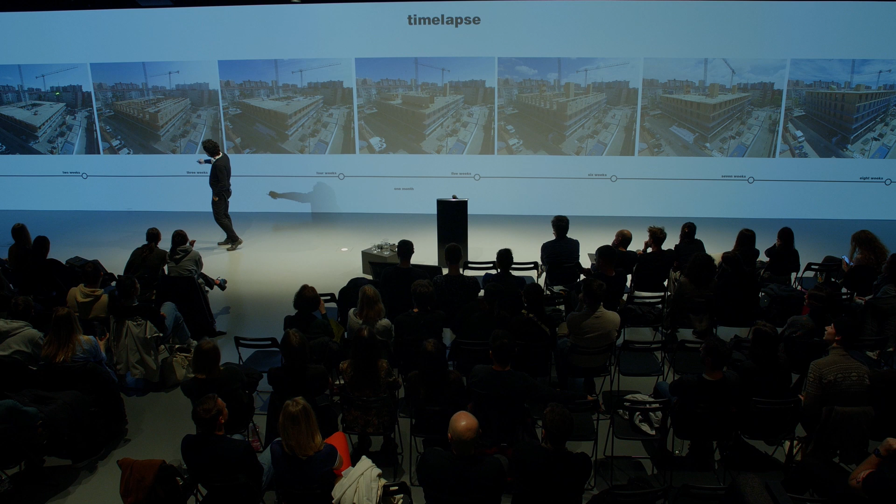To finish, this is a time-lapse video—each photo represents one week. This is the first week. They begin slowly because the difference in levels between concrete and wood is around 5 centimeters from one corner to the other.

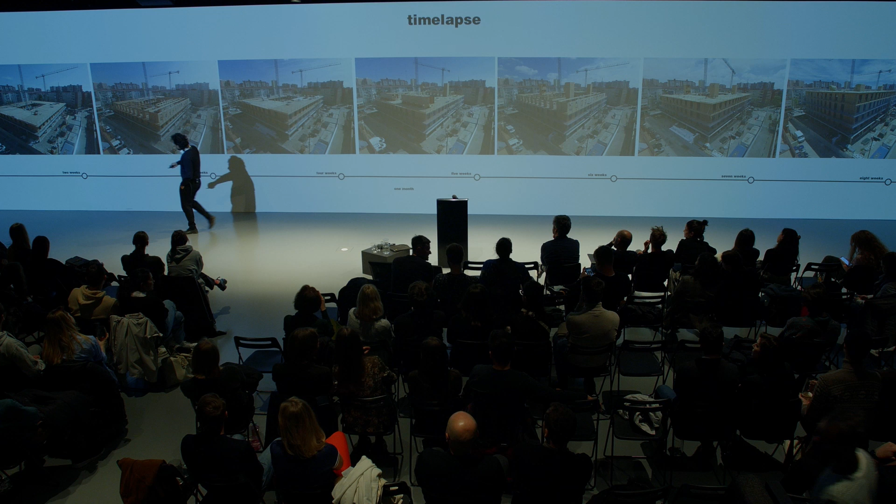So they had to place packing to make the transition, which made it slow at the beginning. In 2 weeks we made 1 floor, then they go faster—3 weeks, and now much faster.

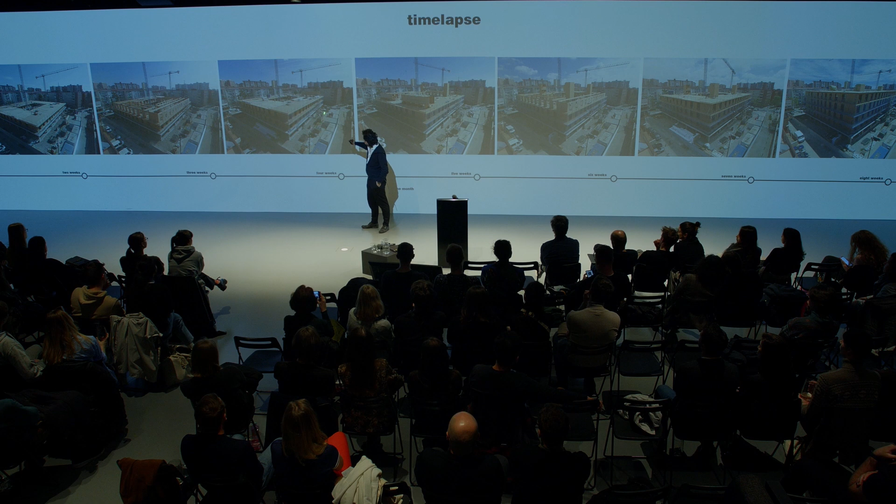Here the important thing is they begin building the stairs, made in one piece. These are the elements that allow the building to withstand the wind. It's funny because this wind-resisting element can't be installed at the very beginning, since it would fall in the wind—you need at least 2 slabs built first for these towers to be stable.

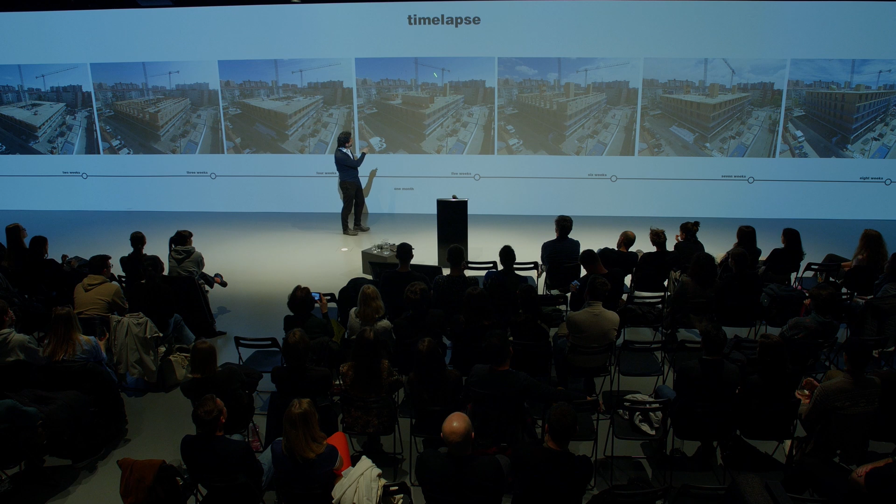So here they build the towers—we have the 4 stair towers built in one piece—then they continue through week 6, 7, 8. In 2 months you can stand up this 5-story structure. It's really, really fast.

And from the first month, they are working underneath because you don't need auxiliary support elements. And that's it.